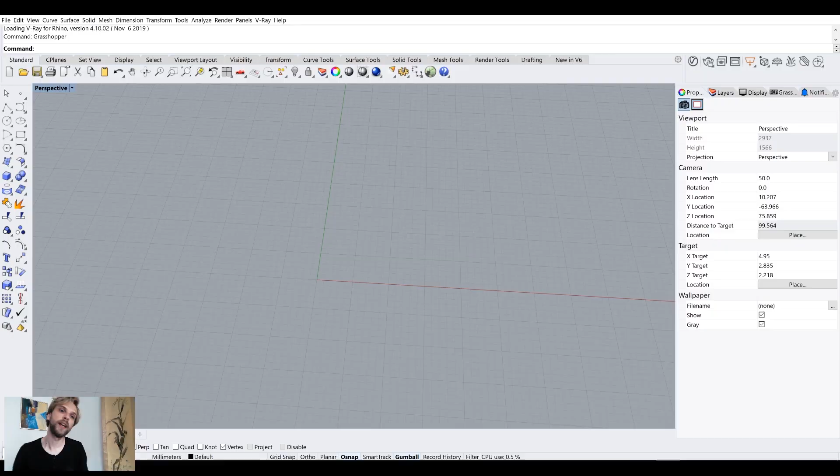Hello, and welcome to tutorial number 26 of the series of 2020, where we're going to look into curved folding of steel sheets and how to do that in Grasshopper.

Last tutorial, number 25, we looked into origami, and I was thinking that, well, origami most of the time just has this kind of straight line fold, but what if you use a curved fold? And then I started looking into these really cool, I guess more experimental pieces, and figured out that you can indeed make a curved fold, and we'll be trying to do that. So let me just find one that's kind of, yeah, something like this.

You have something flat packed, then you just have these kind of seams, these kind of ridges, which you fold, and you end up with a three-dimensional shape right here. And some of them are quite cool, some of them are quite boring, but this is pretty damn cool, I think. So let's do that in Grasshopper.

And before we begin, there's one thing. Most of the steps that I take here are going to be quite similar to the ones that I've already done in my previous tutorial number 25. So I will be going through them quite fast. If you want a slower version, just check out that tutorial.

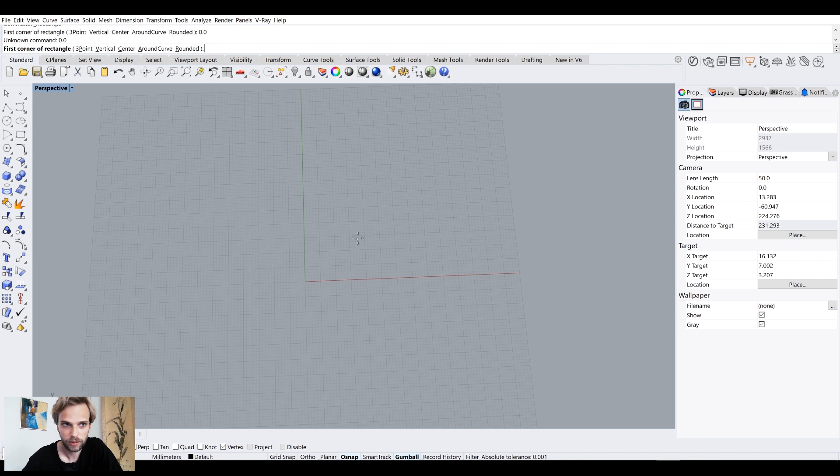Okay, so let's begin. I will start by specifying... Hello? What's up with that? I'll start by specifying a size of my sheet, right? Of my steel sheet. And I'll just draw a rectangle for that. So I just have this kind of rectangular curve. That's my steel sheet.

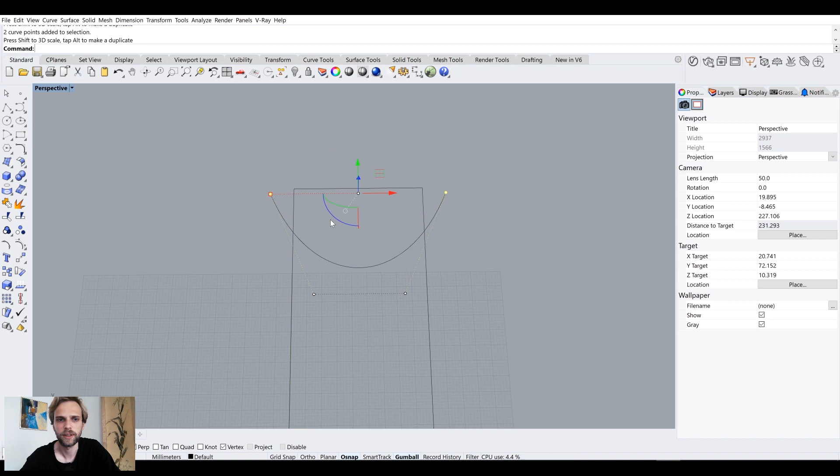And then on it, I will draw, I guess, curves, right? So I will just take my control point curve, and I will just draw, let me just get that perpendicular snap turned on, and maybe smart track. Usually I don't use smart track, but in this case it might be useful. Smart track. There we go. So I just draw out a curve, and it doesn't need to fit perfectly. Let me just do this, for instance. It doesn't need to be perfect. It just needs to be there.

And I'll see that this curve, where it intersects with the rectangle, is going to be a fold line right here, right? So I want actually to have two of them. So, I'm lazy, so I'll just mirror the one that I already drew to the other side. And perhaps we'll have a third fold line, which is going to be boring, and it's just going to be a straight line segment. Later on we can mess around with that a bit more, but for now I'll just leave it as a straight line segment.

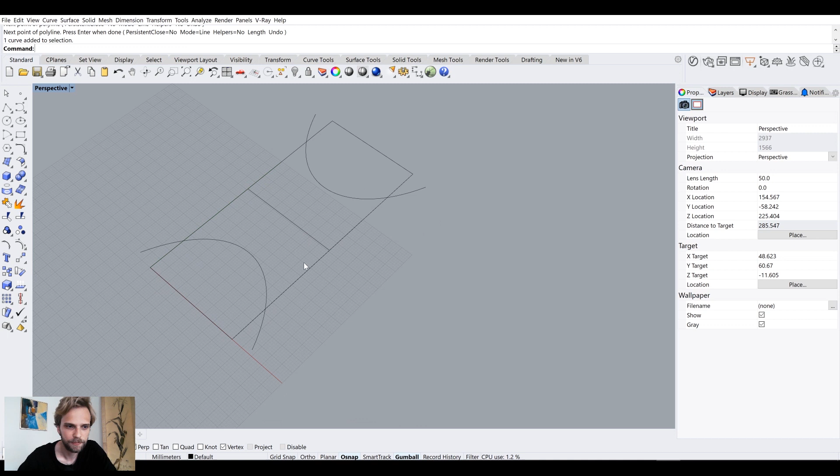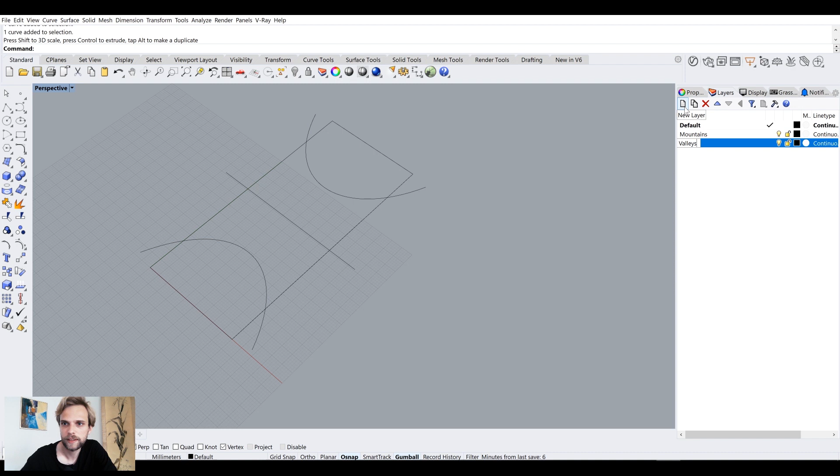Alright, so we drew a basketball court. Who cares? Okay, and that's all I need, right? Perhaps, just to make it pedagogical, I will create two layers and call one of them mountains and the other one valleys. And mountains will be blue and valleys will be red. And I will take these two arcs and I'll say that those are mountains, and I'll take the middle line here, and that is a valley. So mountains and valleys, right?

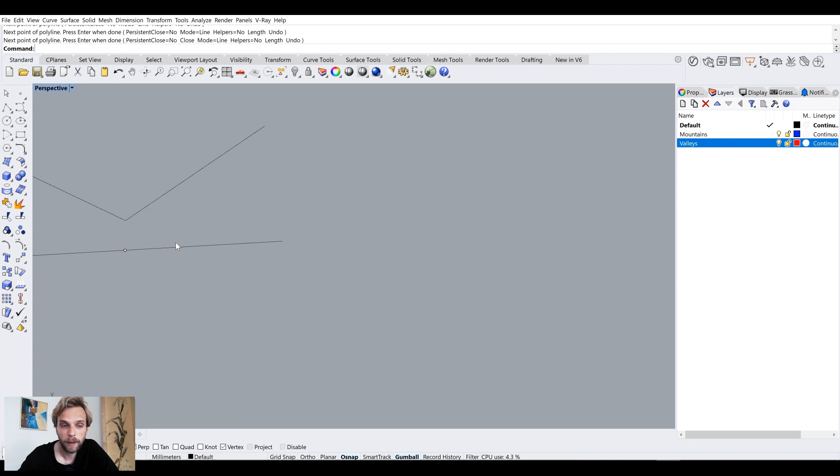Valley means that as a sheet of paper folds, let's say we're looking at it from a section, if there is a valley line right in the middle, just like here, as the sheet of paper folds, it will fold like that, right? If there is a mountain line here running through the surface, it will fold upwards, right? So it's just basically the direction of the fold, nothing more.

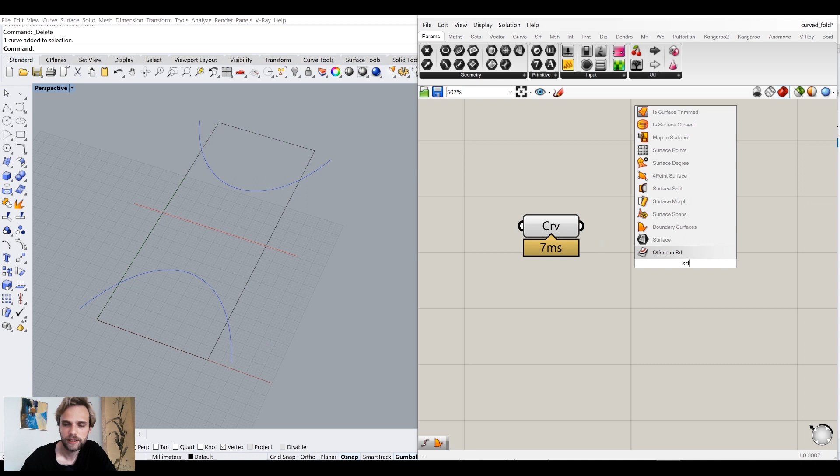Okay, let's begin working with it in Grasshopper. I already have a small setup here, but I will be repeating everything. This is just my notes, so don't worry about that. I will reference in my rectangle here as a curve. Set one curve like that, and I will make it into a surface. Since it's a flat rectangular curve, I can just type in surface and plug my curve into a surface, and it's going to make a surface.

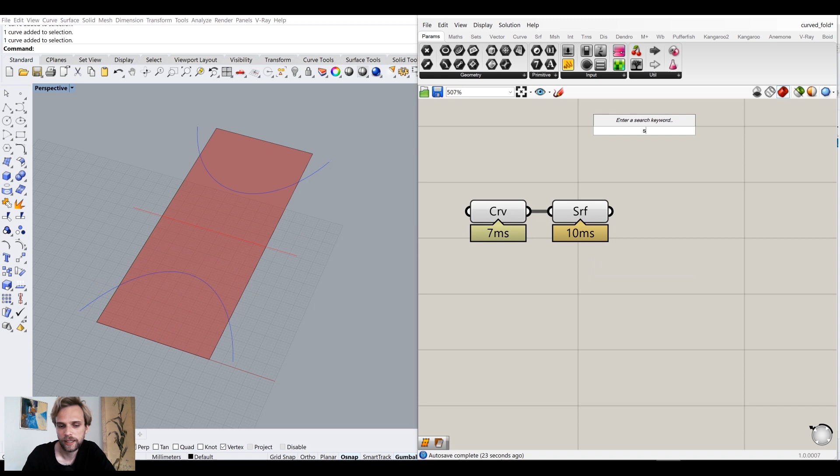Okay, that's good. And then I want to take the surface that I have and divide it into 4 surfaces with these 3 curves, right? All of these 3 curves. So I will say surface split, and I'll connect my surface to the surface input. And for my splitting curves, I will just type in CRV again, curve component. Right click on it, set multiple curves, and I will just set all these 3 like so. So now, hard to see, let me hide the layers of the curves for a bit. So now you can see I end up with 4 surfaces, which is great.

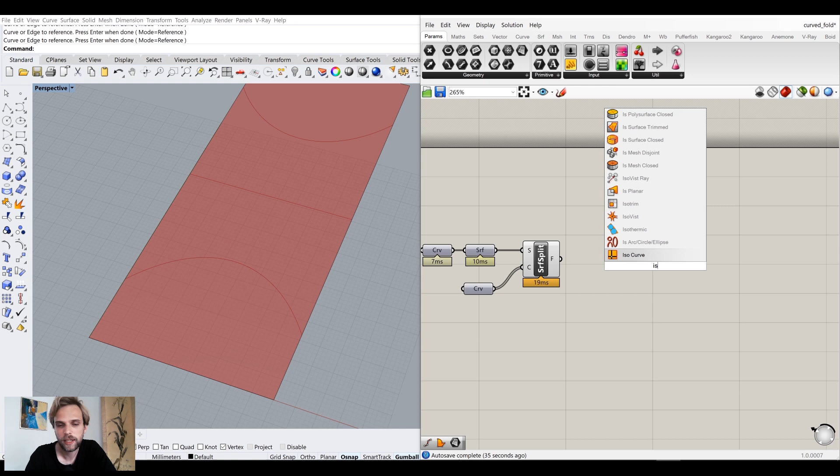Then I want to divide them up. I basically want to have more resolution, right? So I want to divide them up into these kind of small stripes. I can do that by using a tool that's called Isotrim. And it asks me for a surface input, and I have 4 of them. That's perfect. And then it asks me for a domain.

And I'll stop. There's a problem. It asks me for a surface input here, base surface, and I'm giving it trimmed surfaces. So Isotrim will not work because, for instance, if I have a surface like this, right, and I trim it with, let's say, this shape, trim like that. If I trim it, this is a trimmed surface, right?

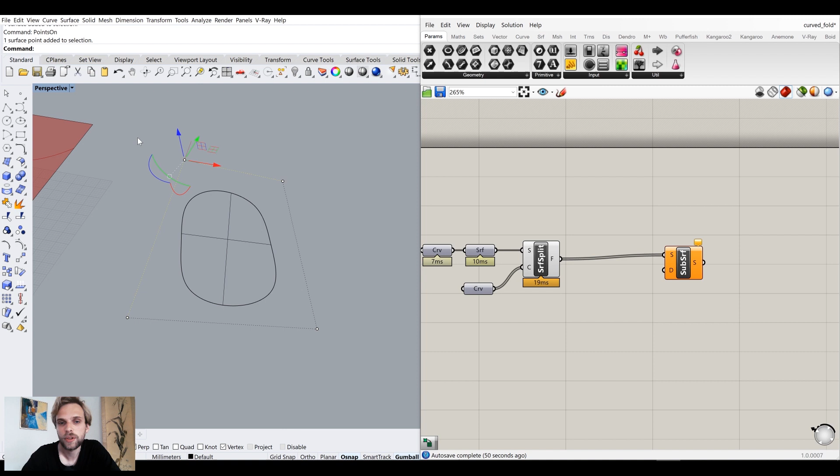Looks okay, but if I were to turn points on, you can see that the control points are from the original surface, meaning that the domain is also going to be from the original surface for each one of these. Every single one of these 4 pieces will have the same domain, and it will not work. So we can't do it this way, but instead we need to do it in between the surface here and the surface split here.

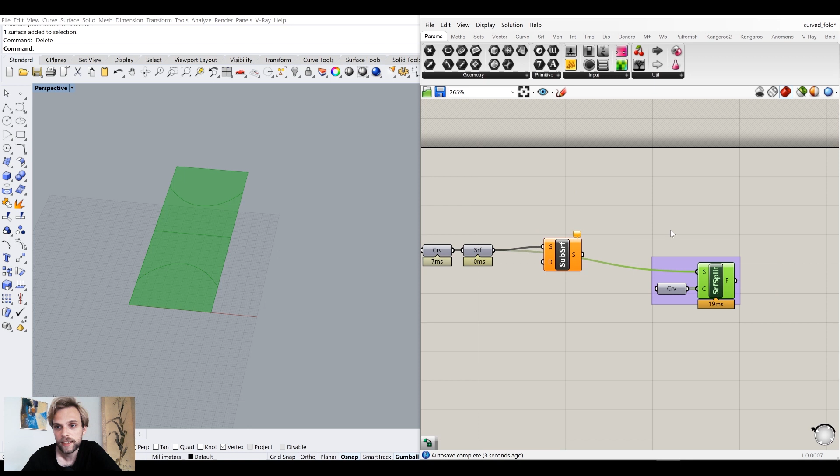So let me actually group that part. So the large surface will need to be divided and then split with those 3 curves, right? Like that. Then it will work. So now let's divide up the large surface that we have here. Isotrim asks us for a domain, and I can get a domain by just going to Math, Domain, Divide Domain squared, 2-dimensional domain.

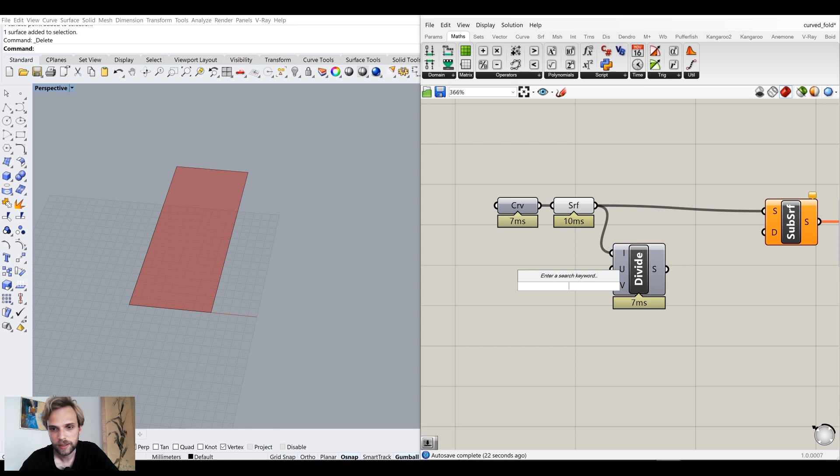It asks me for 3 inputs. The first one is my surface. The second 2 are going to be how many divisions. I don't want any divisions in the same direction as I have my fold lines. I want divisions in the opposite direction. So one of these inputs is going to be 1, and the other one is going to be, let's say, 11.

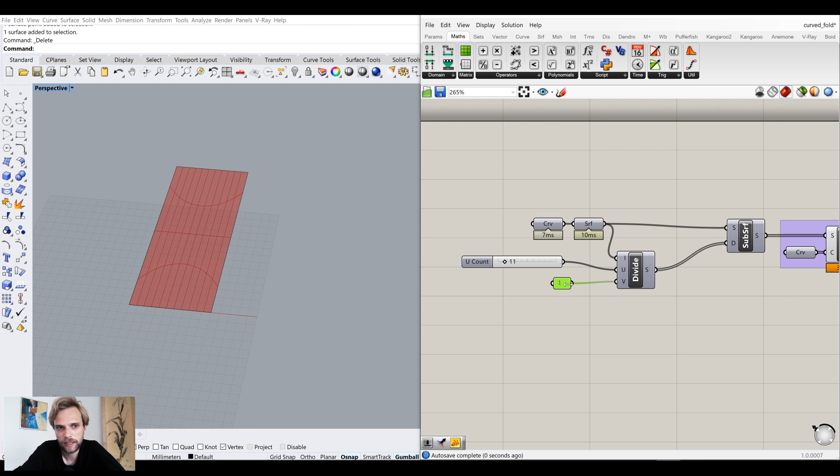I'm just plugging them in 1 and 11, but it might be the other way around for you. You will see it once you connect your surface to the divide domain, and your divide domain to the domain input here. Like that. Let me hide a bunch of stuff. And I can see that I messed up, the divisions are indeed going in the same direction as the fold line, so I need to swap these two guys. Like that and like that. And now it's exactly as I want it to be.

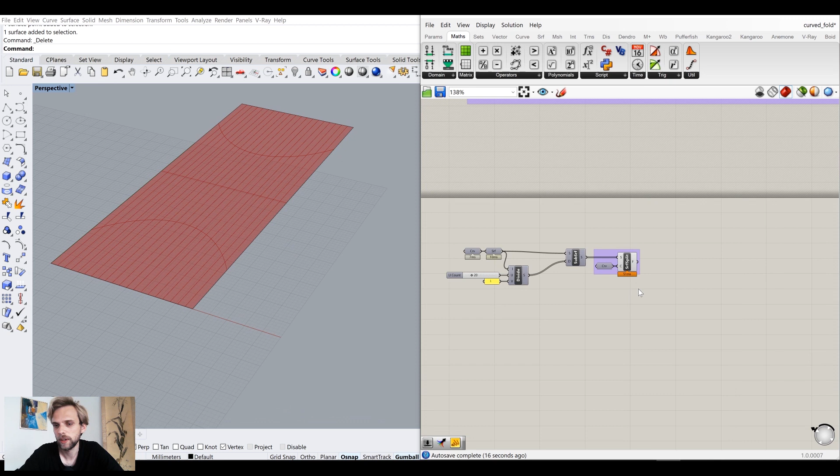Increase, decrease. Don't do too much though. For now I will do 20 and we will see if it works with 20. Okay, so we have that going on, and we have our fragments, right? Basically the way it works is we have a surface, then we make 20 long surfaces with this component. And then we take every single one of these long surfaces and we split it with 3 curves, right? So we should have 80 surfaces in total, and we do.

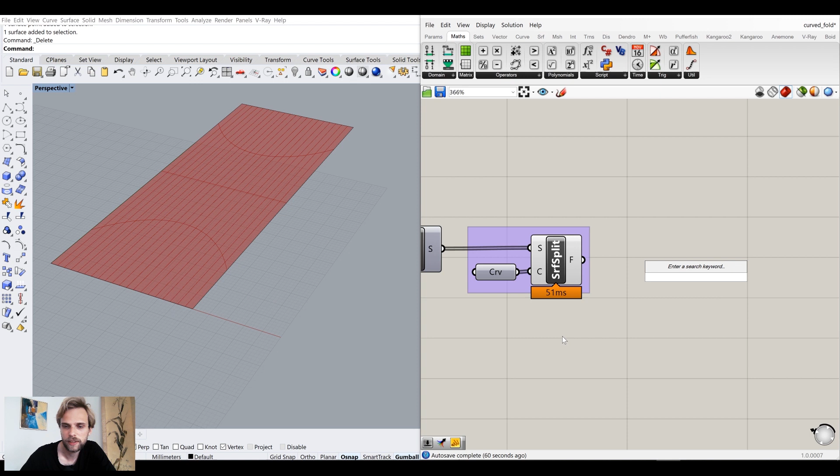Okay. So now I need to make them into a mesh, and it's going to be quite easy. I just need to get the corner points of these surfaces, and I believe Discontinuities will give me that. Yes, indeed they do. So I get my discontinuities here, 4 corner points. I know for a fact that every surface here will have 4 corner points. So that means I can use Construct Mesh.

The way Construct Mesh works, it asks you for points, and see how this already has a default value of quad between 0, 1, 2, and 3. It's just going to make a single mesh face between those 4 points that you give it. Perfect. We do it. There we go. And I just keep hiding stuff. So now Construct Mesh gives us 80 mesh faces, right?

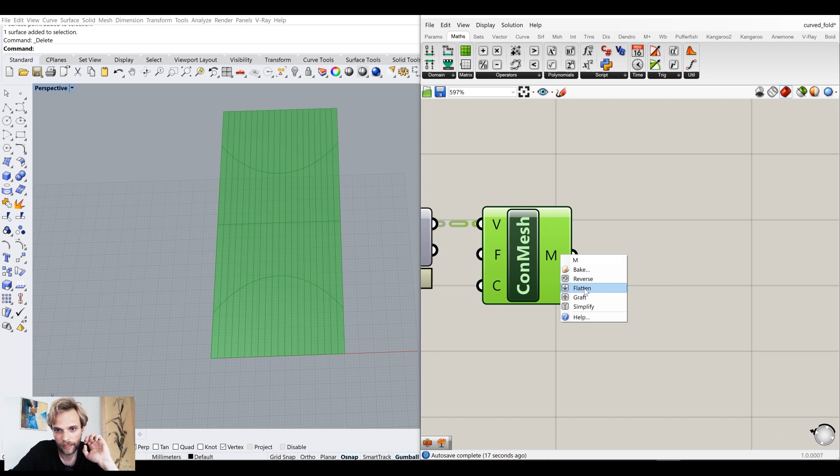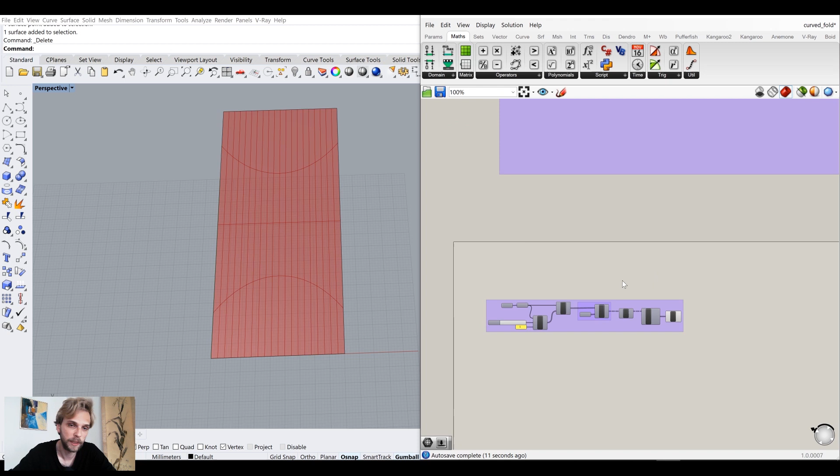All of them in separate data branches, so I don't need that. I will flatten it. So now everything is in a single list, and I will just use Combine and Clean from Kangaroo 2. It basically just joins up the mesh and cleans it up. Okay, so we have a mesh ready. This whole part is responsible for making a mesh. Yes, we are well on our way. Now I will not be doing those 2 parts yet, I will be doing them a bit later. I just want to see this folding in action.

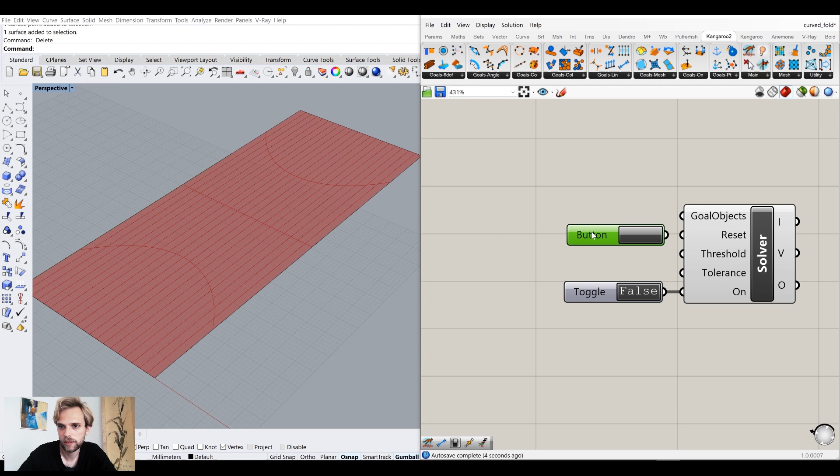So we have a mesh here. Let me position it properly. I will just create a mesh component, just like that. Okay. And now I want to create a Kangaroo script, right? So I will go for a solver. Again, I know I'm rushing, but the slower version is available on tutorial number 25, so you can check it out. So toggle is false, button is a reset button, and then I Entwine to be able to get more than one input in.

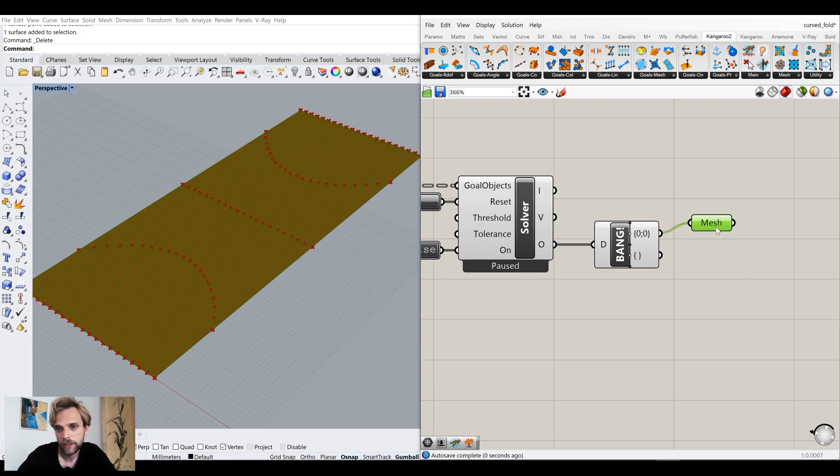Then show will be always at 0, 0, and we will be showing a mesh. And actually I just want to create a separate mesh container here for the show, just like that, and connect these 2 guys. Perfect. And then solver output will also come out as a data tree, so I exploded that data tree, and I know that since mesh comes into 0, 0, from 0, 0, a mesh will come out. And I'll just make a custom preview, make it pink. All right, and I just hide everything.

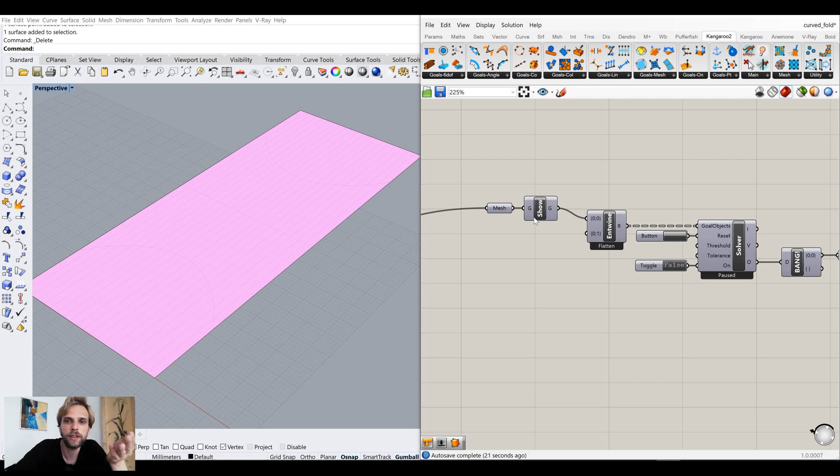So now we have first goal, and we have a solver doing its thing. Now for our other goals. First of all, we don't want the material, this sheet of metal or sheet of paper, doesn't matter, we don't want it to be stretchy, right? So I will go for goals mesh, edge lengths, and it asks me to give it a mesh. Sorry, I'm just thinking. Yeah, so I will give it a mesh here.

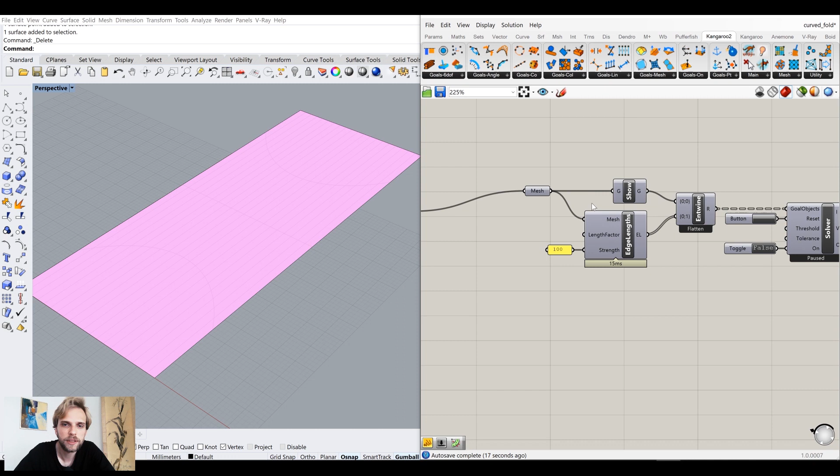Yeah, and I will say the length factor is 1, that's perfect, and strength, I will just give it like 1,000 strength. So definitely a really, really strong force. Maybe 1,000 is a bit too much. Let's try 100. How much did I use here? I can't see. Just let me unfreeze this. No, that's the wrong one. 100, yeah. So I will use 100. Okay. So now basically every line on the mesh tries to stay as it is, and also show the mesh. We have 2 goals.

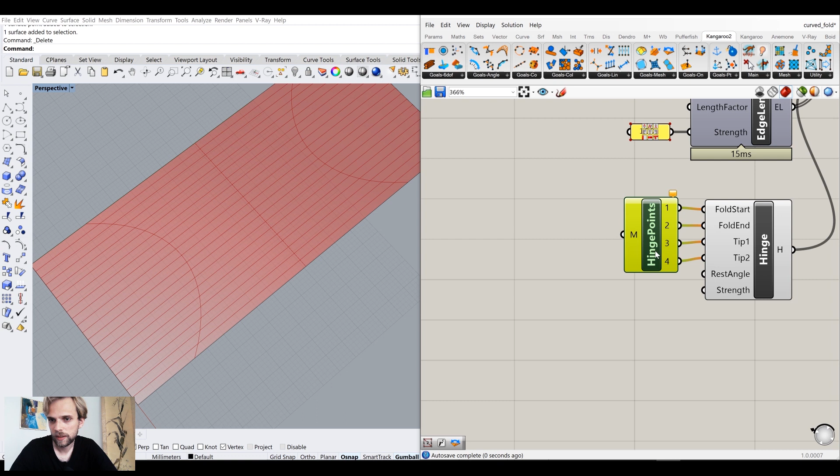Nothing fancy. Okay. Next up, we need bending, and for bending, we will be using goals mesh hinge. Right? Oops. Hinge. This goal right here, which connects to 0, 1, like that. And then it asks me for 4 points. I could extract them manually, but I am lazy. So I'll just go to under Kangaroo 2, mesh hinge points. Hinge points right here, and just connect them like so. So it's like door hinges, right? And I'll connect mesh to here. Okay. So we have that working.

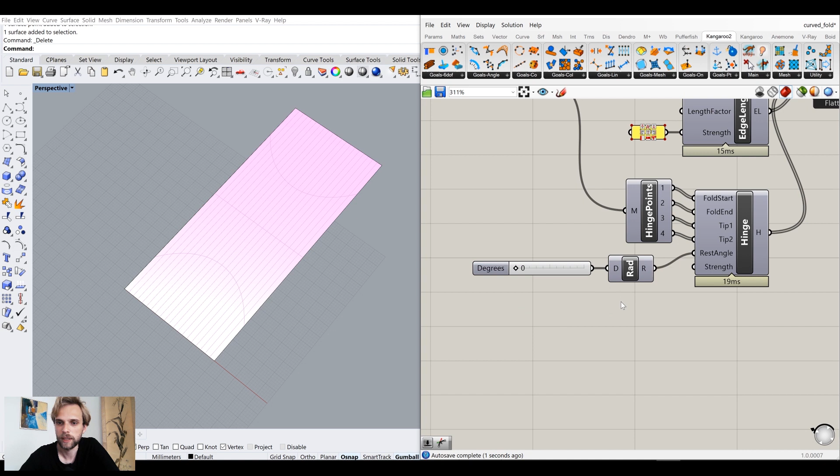And the strength, we don't care. The rest angle, though, we do care. So the rest angle is going to be, first of all, it's going to be in radians. So I will be using degrees, but I will be converting them to radians here. And degrees are going to be between 0 and 120. For now, let's do 0. Connect them like so, and that's my main thing here.

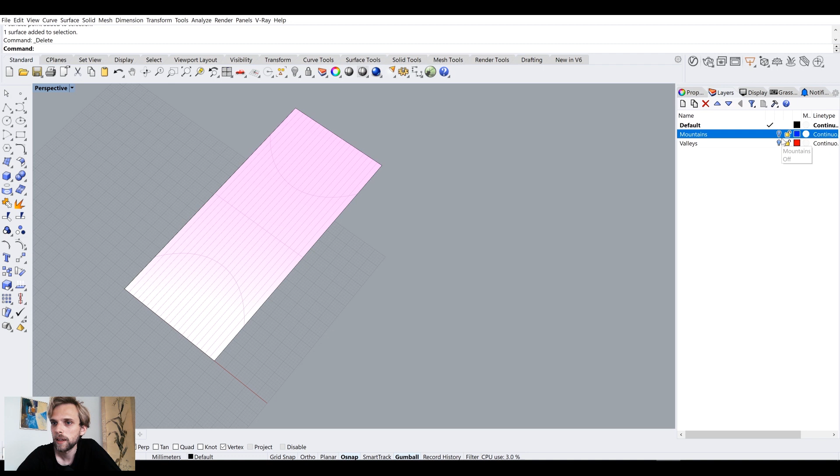There we go. Okay, so the problem now is that every single edge here is a hinge for this definition. So everything will kind of crumple. We only want edges that are running right along this curve and this curve to be hinges. And again, I did that in tutorial number 25, so you can check out the slow version there, but I will be, of course, doing it again here.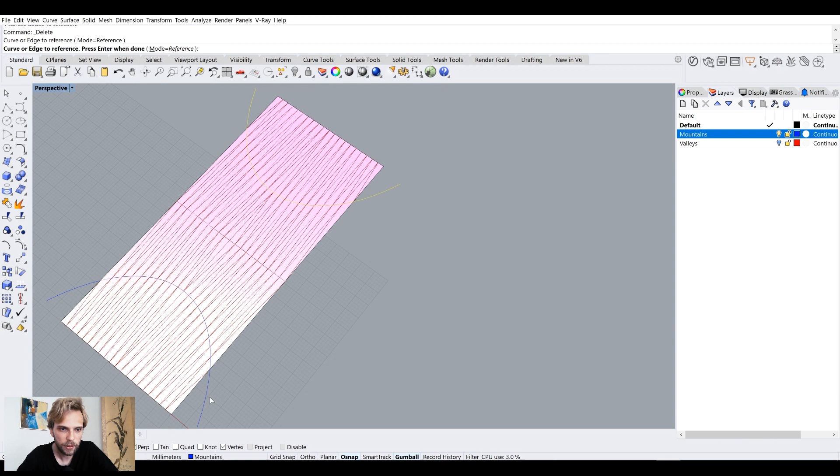But much faster. Line, I just create a line between first point and second point to show where the hinges are. And yes, it triangulates the mesh, don't worry about that part, as long as we still get these lines here, and also we will fix the mesh triangulation in a bit. So we get all of our hinges, and then I will create a curve component, set multiple curves, and I will just reference in these 2 arcs here, just like that.

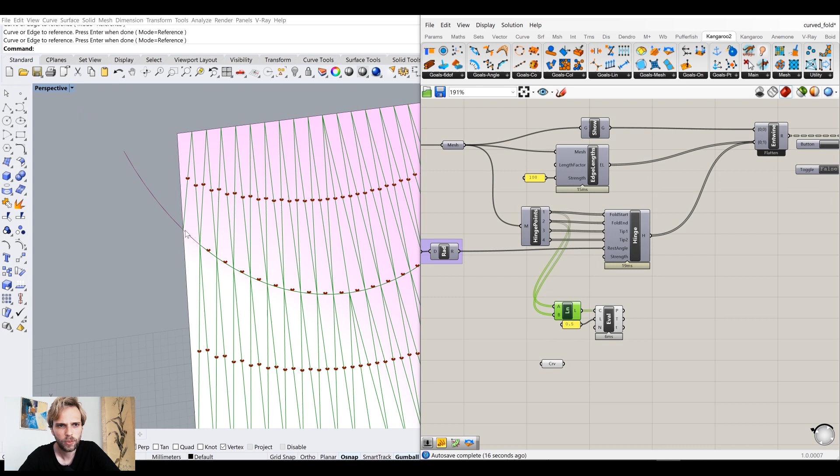And I will say every line here should give me a center point for each line. Evaluate length / 0.5, and just connect it like so. So I get a... oh yeah, okay, that's perfect. Is it though? Why are you not, and you as well? What's up with that? Wait, something's fishy.

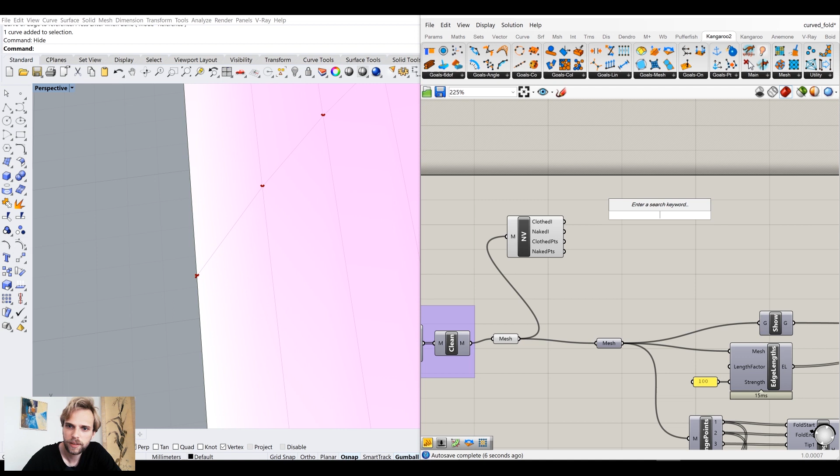Hide. Are you considered to be a naked point? Something's messing up. Just a second. Panel, no, not panel, just point. Yeah, so this point is a naked point for some reason, but that's fine. We can fix it by, right after combine and clean, we can use align mesh vertices, align vertices. Yeah, let's try align vertices. And the result has 107 vertices, and this one has 107. Okay, 0.1. Why are you not working?

This align vertices component never works. God damn it. Okay, let's see. Weld, mesh weld vertices. This component right here. What about you? 105, super. Okay, so this just works.

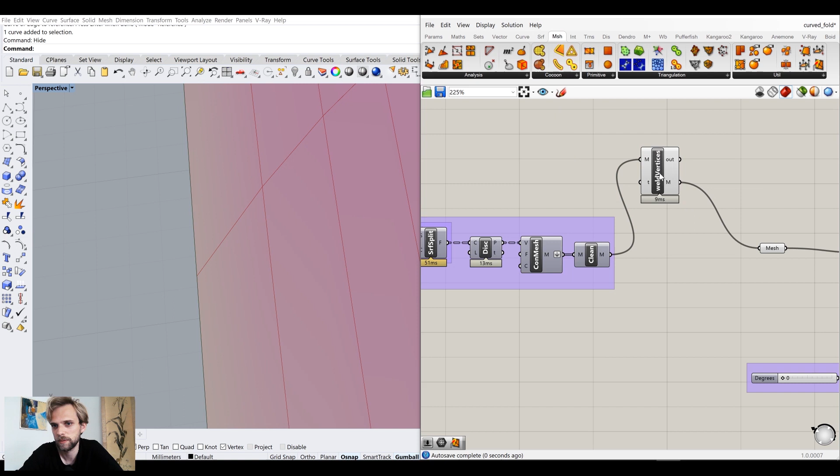I don't know, I'm having problems with the align mesh vertices. But basically, this one just removes all of the duplicate vertices from the list. So now all of the midpoints are correct. Okay, good. And basically, I just want to measure. I just want to drag these midpoints towards the curve, right?

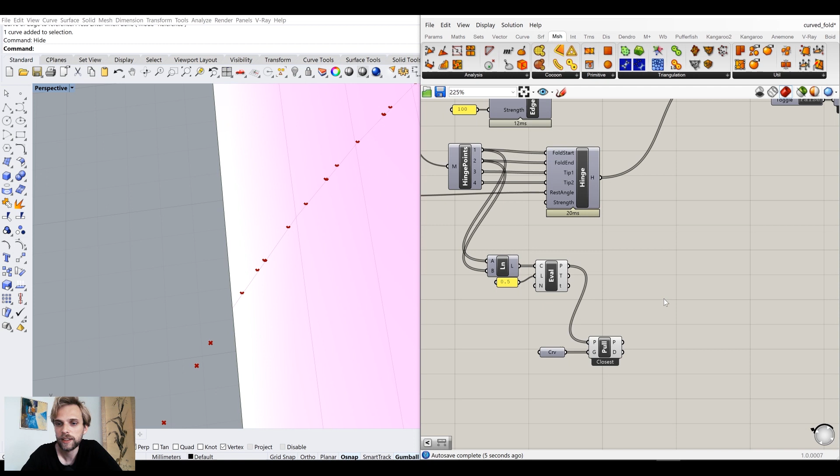So I will pull point. So pull every point towards the curve, and I get a bunch of distances. So basically, it's just measuring. It's finding the closer curve from these two for every one of these points, and it's just measuring distance to them, right? And from these distances, I will ask, is it smaller than, I don't know, like 0.1?

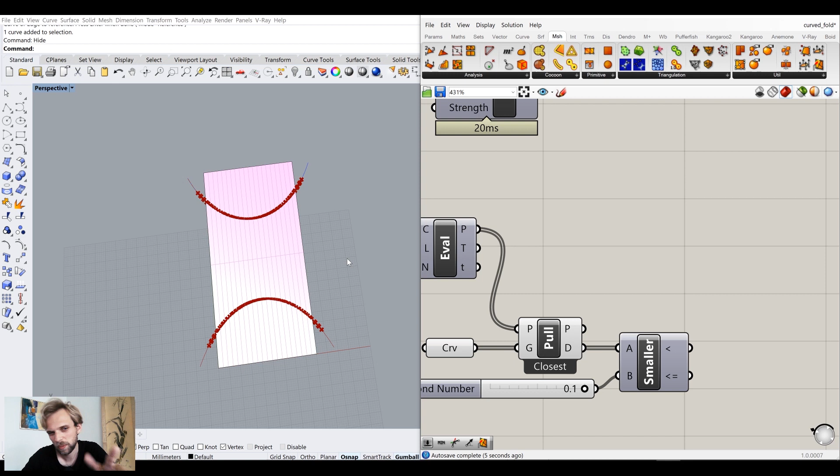We need to work with tolerances for this to work. So is it smaller than 0.1? If it's smaller than 0.1, it's fair to say that it's a point that is on this curve. Okay. And I have true and false statements, and I can cull pattern with these true and false statements. And for now, I will just cull the lines just to see if it works or not.

Control A, hide, and hide stuff here. Yeah, seems to be working. So I cull all the lines. But we don't want to cull the lines. What we want to do is cull the hinges, right? We want to cull the holes, so that it only bends on these lines. So instead of culling lines, I will cull the hinges and connect that to my entwine instead of the original hinge.

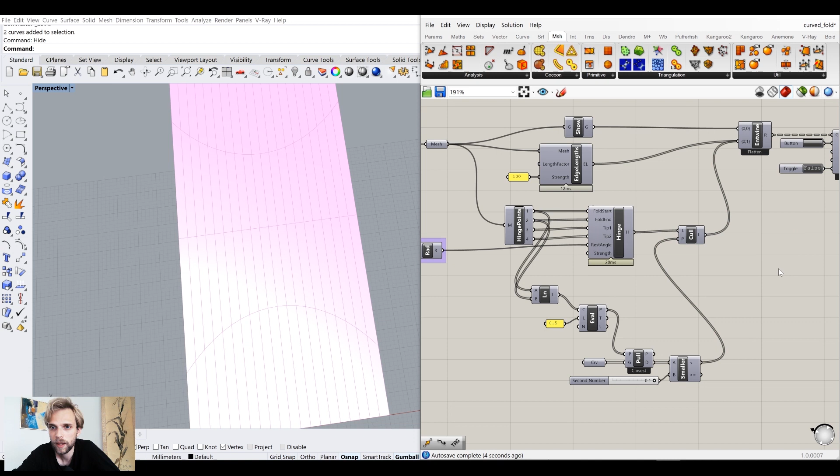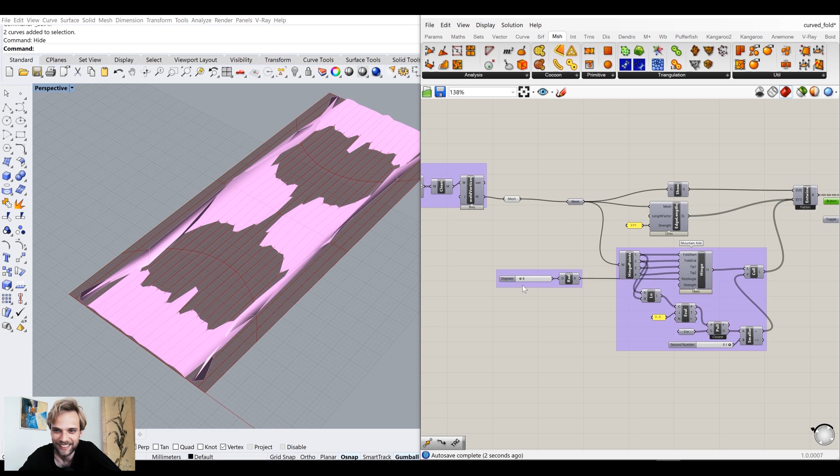Okay. And I will just group this part. So we have our mountain folds here, and I can just call this mountain fold. Okay. Shall we see how it works? It should work at this point. I will just hit reset, hit run, find a nice angle to look at it, and start increasing the degree. Oh, yikes. Start increasing the degrees.

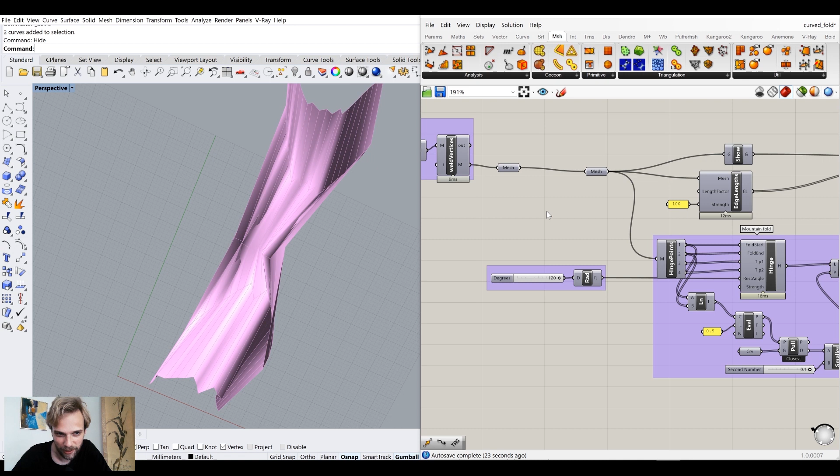I mean, it is folding. Don't get me wrong, it is folding, but it could be better. Okay, so let me change it up, and let's do the valley fold, this straight line here. So I will just copy paste this, connect it as well, and here as a curve, where's my valleys curve? I will use this one as the curve input, set one curve, and instead of mountain fold, I will call this valley fold.

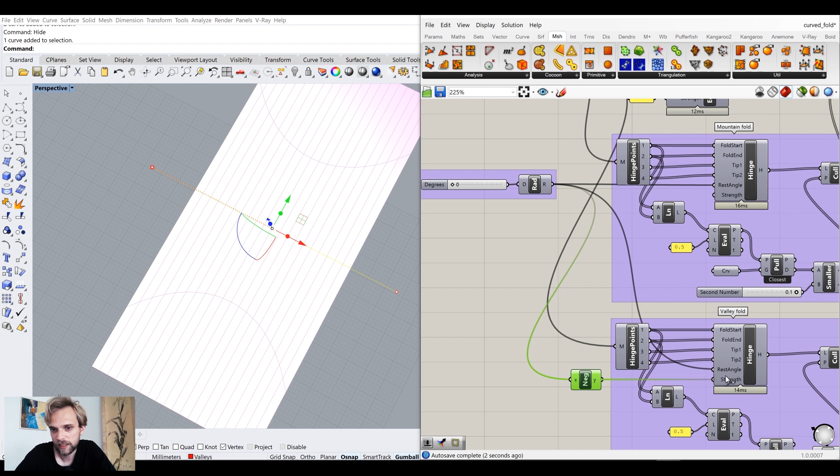And now the valley fold folds the other way, right? So it needs to have a negative rest angle. So I'll just type in negative, connect radians to the negative x, and connect the negative output to the rest angle, like so. All right, so might as well check out how it looks now. I will reset, run it, start folding it, and it just destroys itself. I mean, it is folding, but it's not great at all.

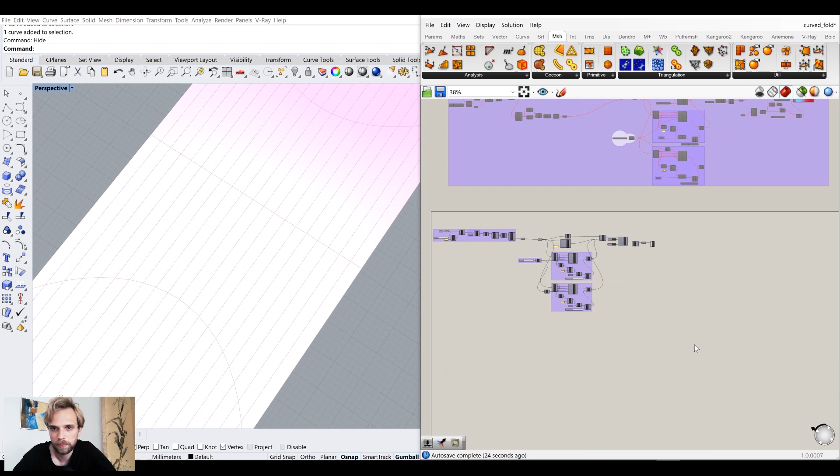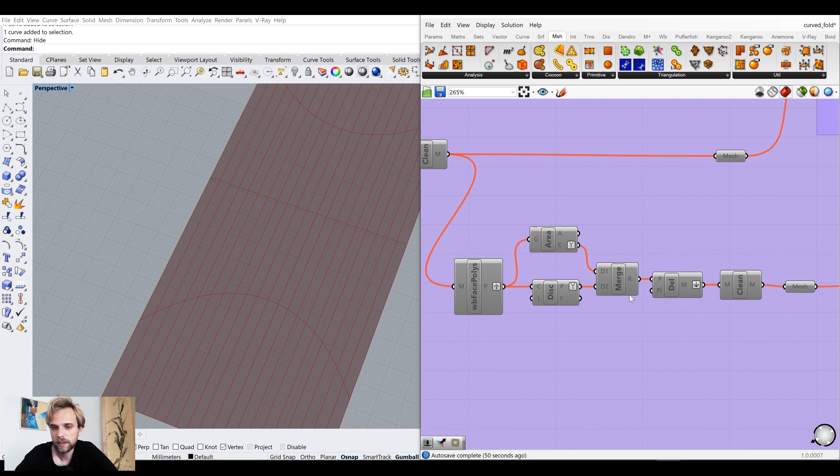Okay, let's make it better. That's why we have these two more clusters of things here, and also some stuff in the back, but it's mostly those two clusters. So between the mesh that we get here and the mesh that we feed into our simulation, stuff needs to happen, right? That stuff is going to be me manually triangulating the mesh. And I don't remember how I did that. That is not how I did that. That is how I did that, okay. So me manually triangulating mesh first.

Let me disconnect it so that it's not in the way. Like that. And I'll say, for every polygon, give me a polyline surrounding that polygon. So Weaverbird's, where is it? Weaverbird, extract, face polylines. This bad boy right here. Okay, and now give me discontinuities. Give me the corner points of each of these polylines. So I get these 4 corner points again.

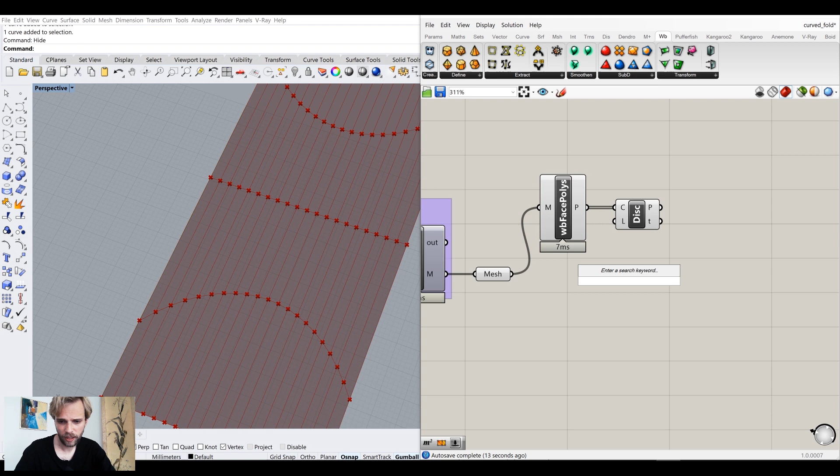And then give me polygon center as well. Right, so it gives me 3 outputs, but it's basically 3 ways of how to calculate the polygon center. I always use the first output here. So I can just type in point and say I will be using that one. Okay, so we have points coming out here, and we have points coming out here.

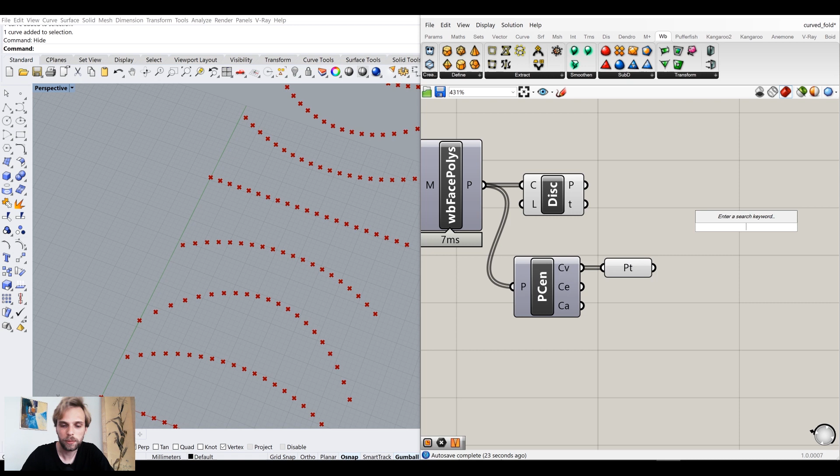And I want to create a data tree where I will have 4 + 1, 5 points in every separate list or branch of a data tree. So I will be using merge for that, connecting my corner points into merge input D1, and my center points into D2. And as you can see from the fact that one of the lines is dashed and the other one is not, this is a single list of center points, while this is an already separated list.

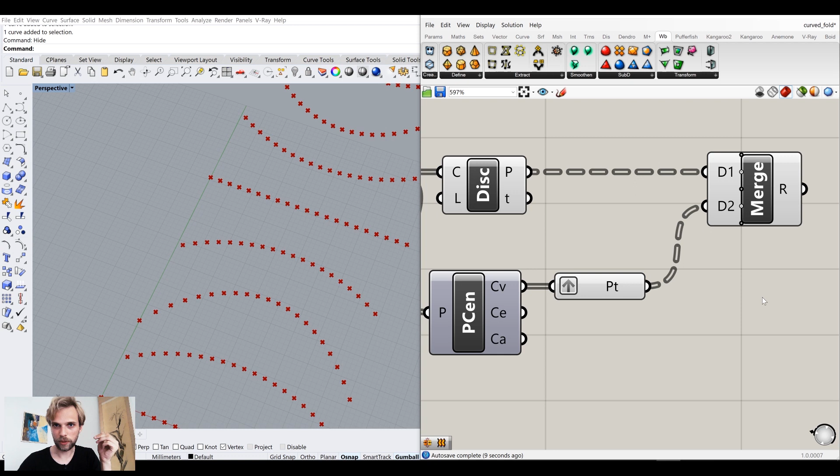So what I'm going to do is graft this single list of points. So now every center point gets its own branch, and hopefully it's going to merge properly. And apparently it does, because when I hover my mouse over the merge output, I can see it's 5 elements in each data branch. So then I just need to create a mesh between those 5 points. This is not a good way by any means, but it works, so we don't care, right? We use Delaunay mesh.

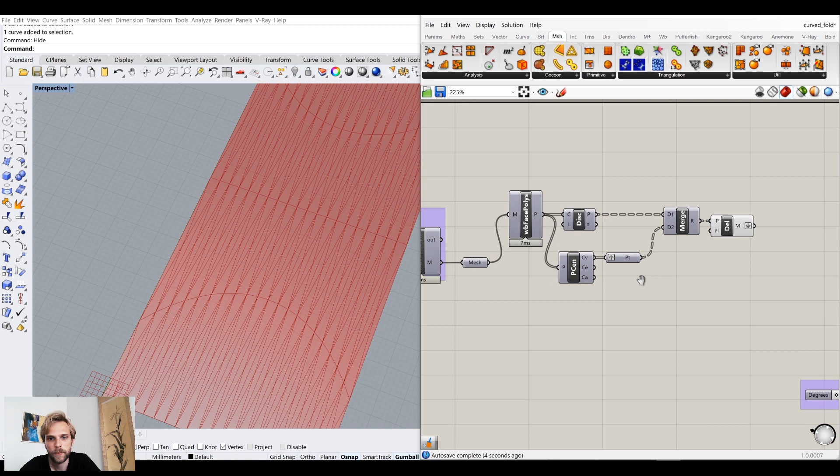We use this tool right here, right? Which asks us for points, and I just give it points, and it basically creates a mesh through those 5 points. So now we end up with 80 meshes again, all of them in separate branches. So first of all, let me flatten it out, just like that. And then I will again use combine and clean. And I will again use the weld vertices component. I'll just copy and paste it in like so, just in case, just to clean it up.

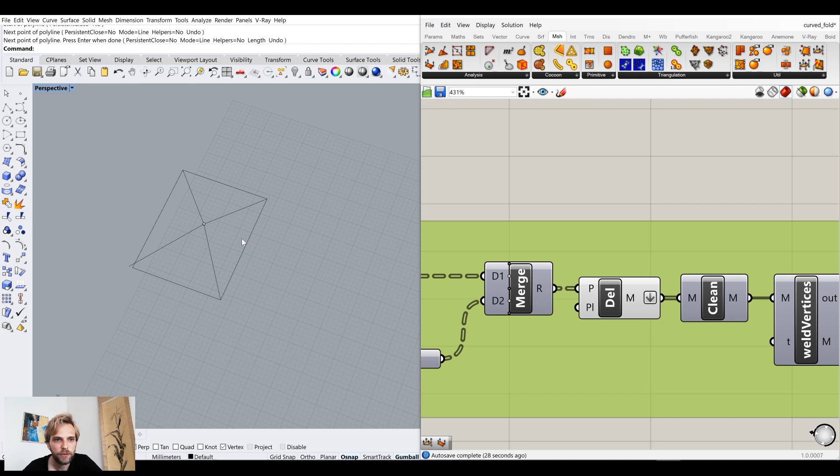So this whole part here is basically us constructing a mesh, getting a center point in each previous polygon and constructing 4, how do I explain it? We have a polygon, we get its center point, and we construct 4 triangles, like triangular polygons on it. So we basically just increase the polygon count of our mesh by 4.

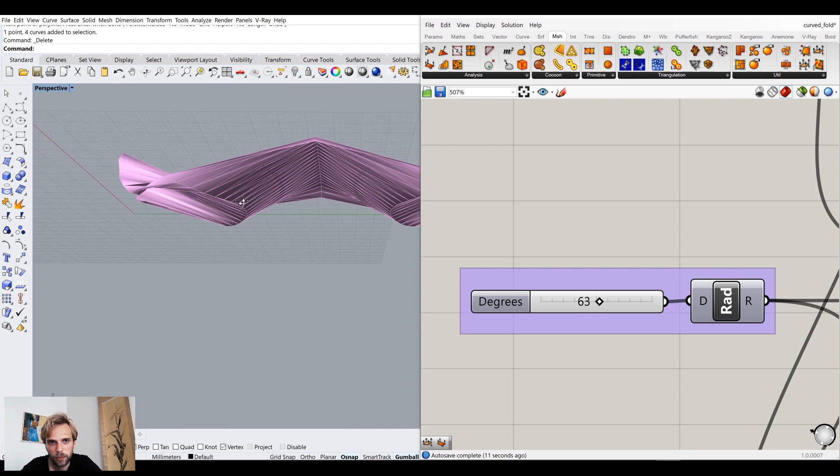And thus, if we connect it now to the mesh input here, it should be much nicer. Let's see. Custom preview, reset. Looks like that. Turn it on. Start increasing the degrees. It's still a bit messy, but now at least the center seems to be working quite well. So at least that. Okay, so we have that going on.

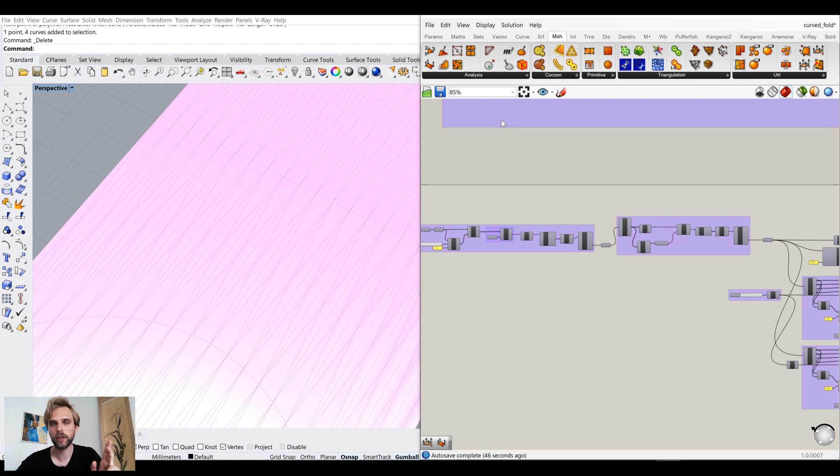Now the last thing before we finish up and just make it pretty is going to be creating cross bracing. You would think that we are creating cross bracing by doing what I just did, but we are not, because you do have that center point. I actually want to have an X, these 2 lines making an X on each of these polygons, and not letting the polygons swivel and twist and turn. Tutorial number 25 explains all of the reasons behind it.

All right, so I'll be reusing the face polylines tool here, and I will be getting the discontinuities again from it. So I get the 4 corner points, right? And then I will use list item, and I will extract the first item of the list, the second, the third, and the fourth, right? So 4 corner points extracted separately.

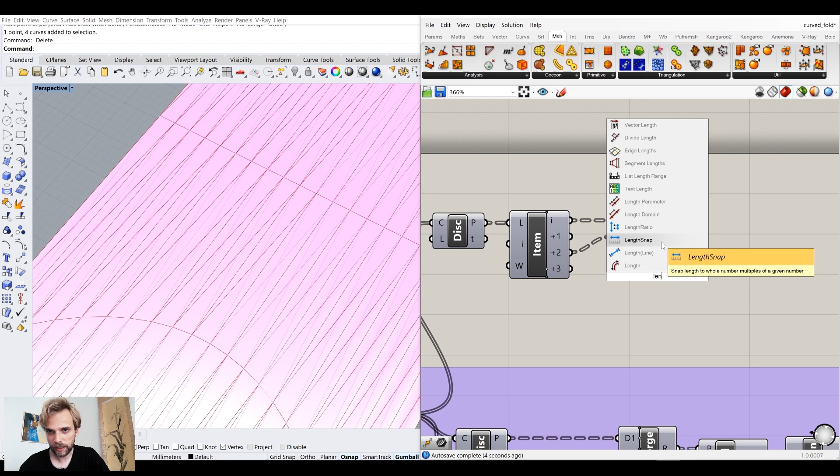And I will draw a line between the first corner point and the third one, so one part of the X, and I will draw another line between the second and the fourth corner point. So we have a bunch of X shapes here. And I will merge these lines into a single happy family and flatten them out. So now all of them are in a single list.

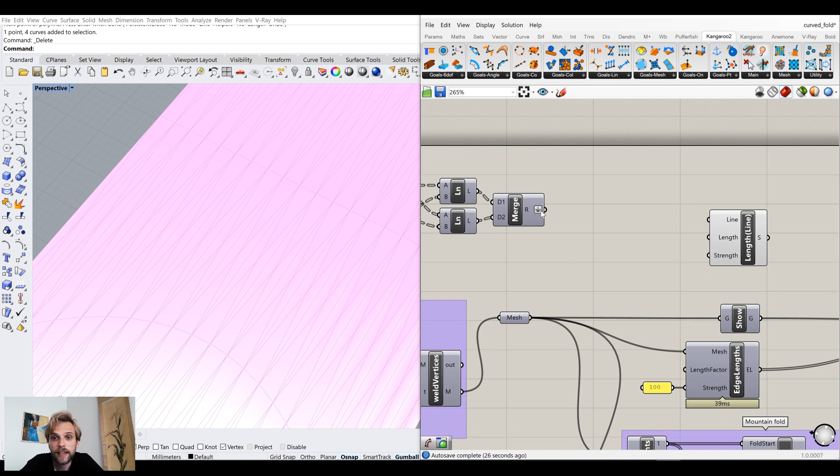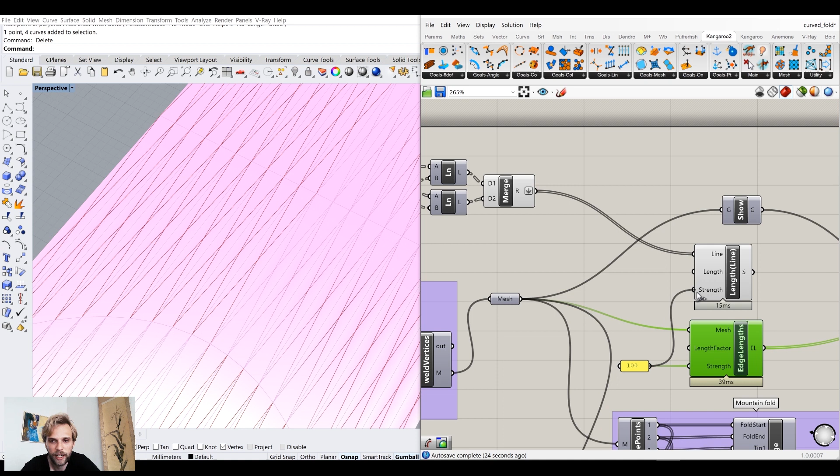And for these lines, I will do a separate thing. I will say mesh, no, not mesh, line length. Let's go to Kangaroo 2, goals, line, length line. Perhaps show should be here a bit higher. These lines that I have here, these cross braces, should also try and keep their original length. If none provided, starting length will be used. Perfect. So they should keep their original length with the same strength as any other edge of the mesh. So that's an additional goal that we give our mesh to make it stiffer.

And now if I run it through, let me hide that. Now if I run it, it should still mess up a bit, but much, much less. There we go. See how much cross bracing matters? So we end up with something like this.

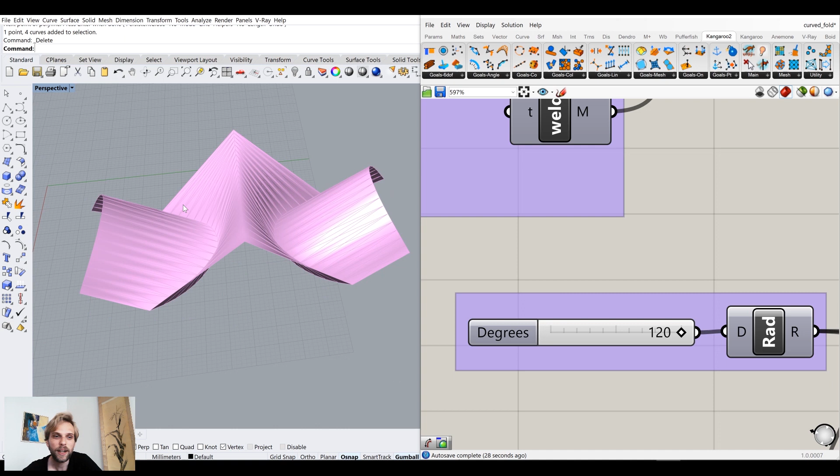Cool, huh? So now you can start messing around with the patterns that you have and that rectangle, because all of the inputs that we are using are these curves here. So you can start designing with this tool and start seeing what works and what doesn't. And keep in mind, some things you just cannot bend, right? It will break. So there are rules behind what you can bend with a curved line and what you can't.

Before we finish up, there's one last thing I want to do, and it's color it according to how much the material stretches.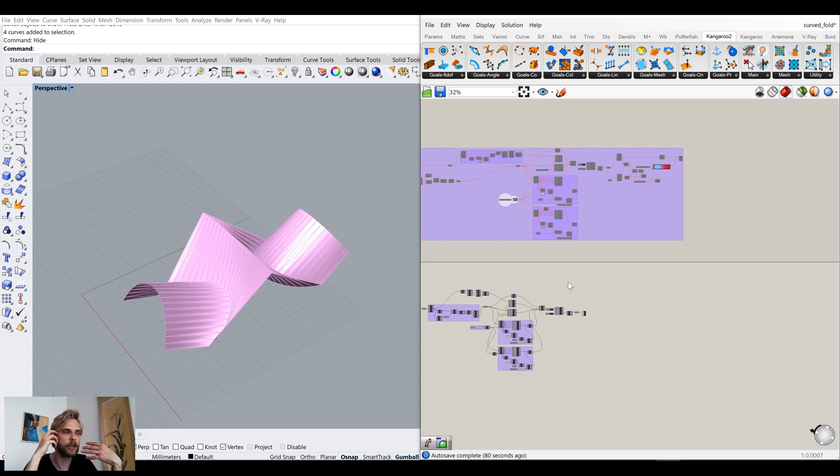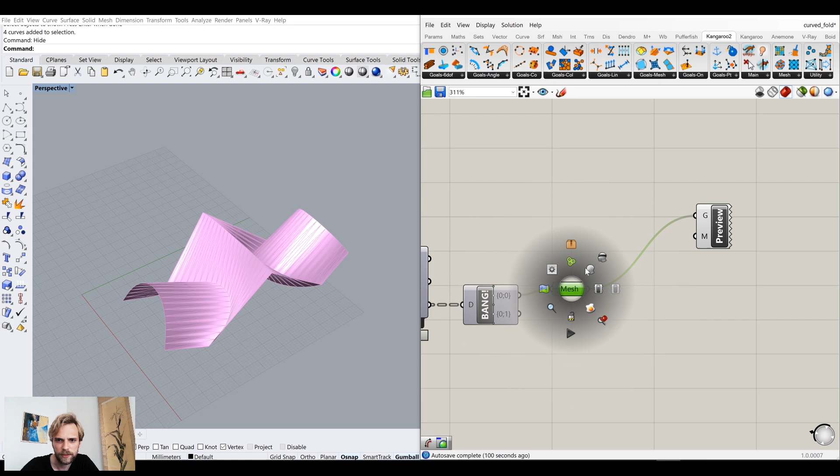So every material has a certain amount of flexibility in it, and I want to color the mesh according to how much each polygon stretches out. And I can do that by measuring the area. So I have this simulated mesh here, and I have the original mesh that is here, right? The flat one, before simulation. So before and after simulation.

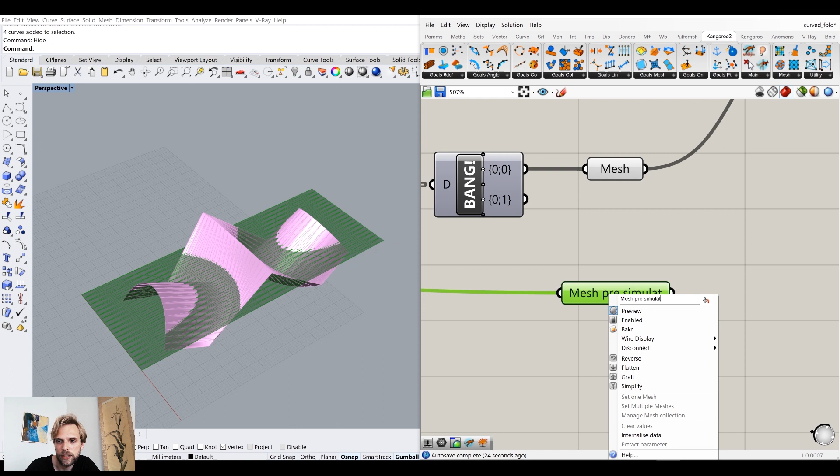So I will just create a mesh component and connect it like so, because I don't want long wires. And I'll just drag it out, and I will right click on the mesh input, go to wire display and choose hidden. Usually I never do this, but in this case, sure. And I'll just rename this mesh pre-simulation. There we go, mesh pre-simulation. And this is mesh post-simulation, right?

So we have mesh pre-simulation and mesh post-simulation, and we need to see how much every polygon stretches. So what I'm going to do is I will say, give me an area. No, maybe we need to get faces. Mesh faces. Fine. Let's just get Weaverbird. Where is it? Weaverbird face polylines. Face polylines for this mesh, and face polylines for this mesh.

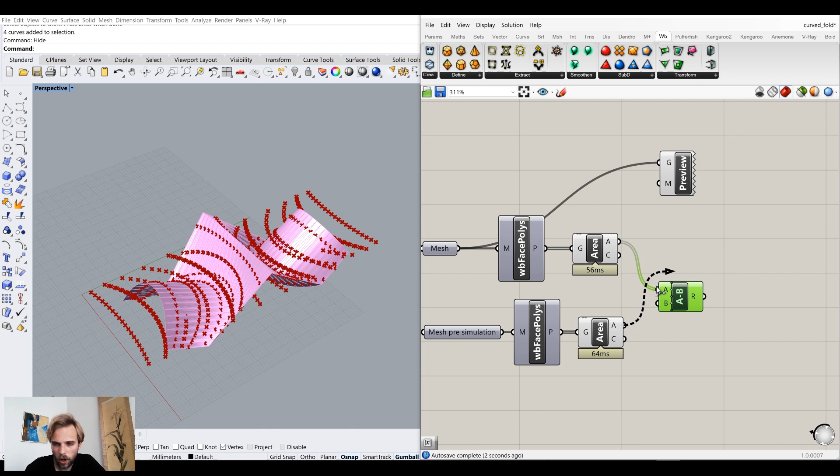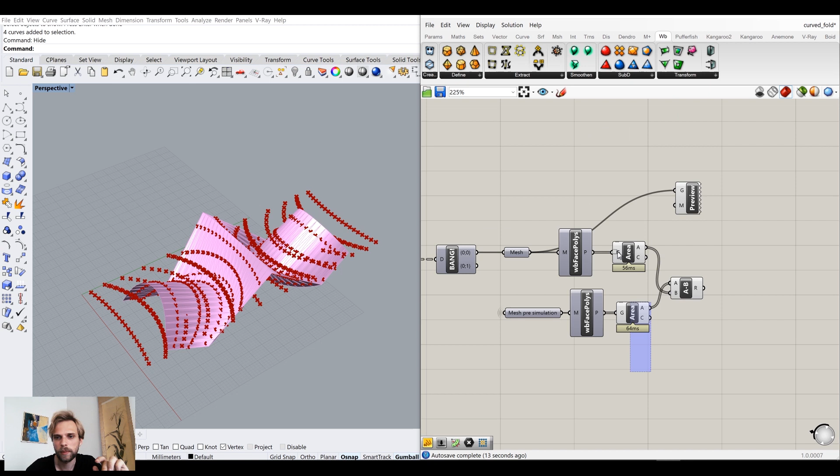So we have polylines, and I will just measure the area of these polylines here and area of these polylines here. And I will compare the change between the original area for every polygon and the new area, right? So I will subtract from the original the new area and see what kind of output I get. These are the changes in square millimeters or whatever between the original and the new for each polygon. And some of them are in minus, some of them are in plus. I don't really care if it's a negative or a positive one.

So I will go to maths. No, it's not going to be mesh. It's going to be maths operators absolute. So everything is a positive value now, right? Okay, so we have a bunch of positive values, and then I want to have a percentage. How much did the original area change in percent? So I will divide this change value, how much it changed, by the original area, and I will get a percentage, right?

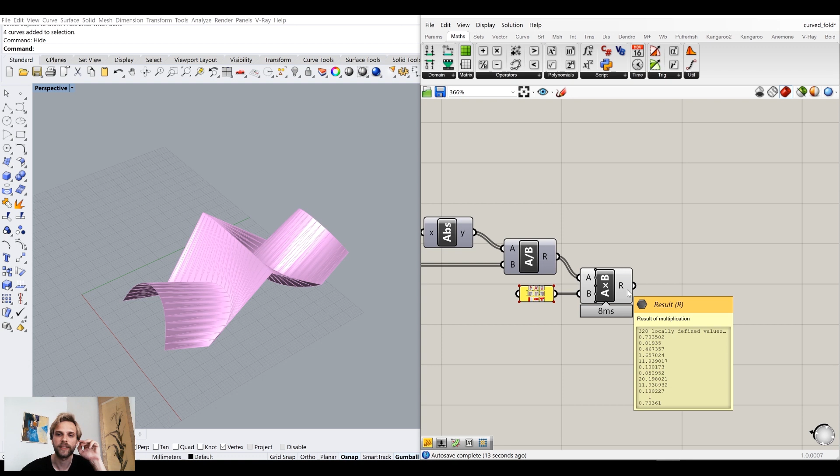No, I will not. I need to multiply it by 100. Proportion, you know, you need to multiply it by 100 to get percentage. And this is percent, how much it's changed. So we can see that some of them are even changed 20%, which is a lot, but you can control it by increasing this value right here and forcing it to be even more rigid. And let me stop the simulation for a bit. Okay. So we have changes here.

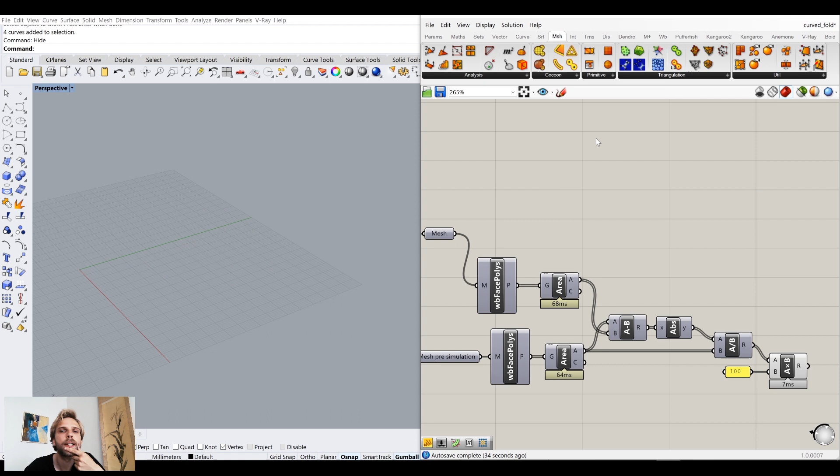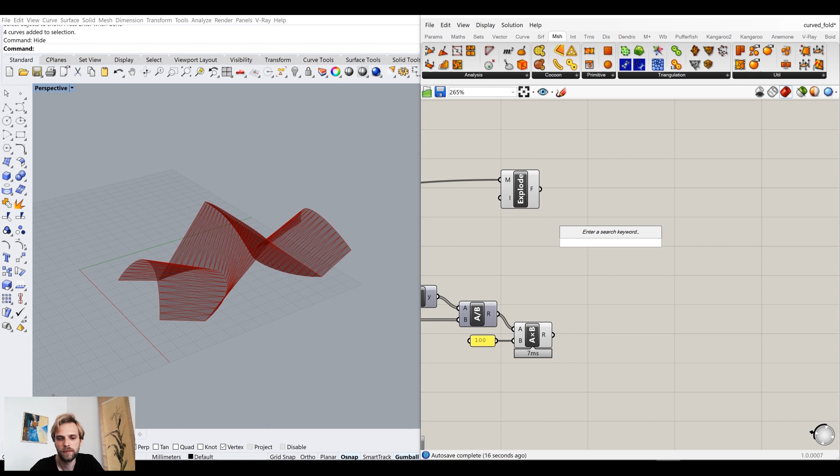All right. And now I want to color this whole thing, right? So how do we do it? Can we just mesh explode? I'll just explode the mesh, and I will say give me, sorry, I'm just thinking a bit. I have this mesh exploded, so this is every face and this is every value for every face. So we need to somehow convey these values into colors, so we will use gradient.

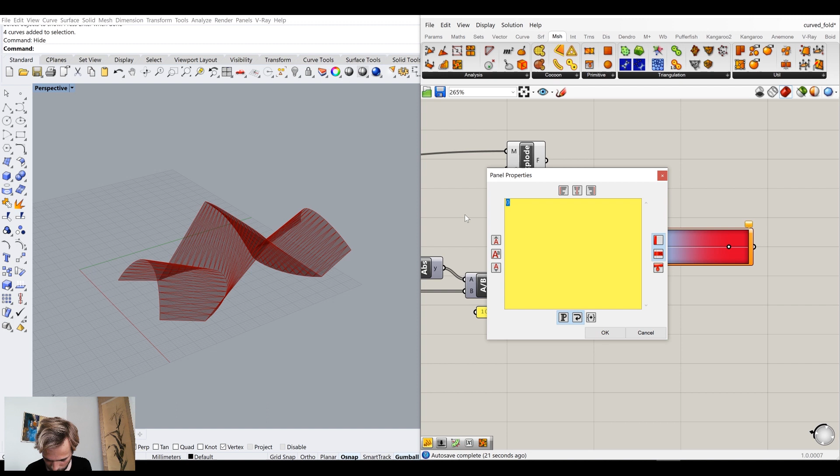We need to use gradient, and I will say that low values are something calm, something blue, and high values are red. And I consider low value to be 0%, and I consider high value to be, if you have 1 square centimeter and it stretches out by 10%, let's go for 25%. That's a really high value for stretching. And the actual parameters are the percentage that we got from here. So now the percentage is converted to colors.

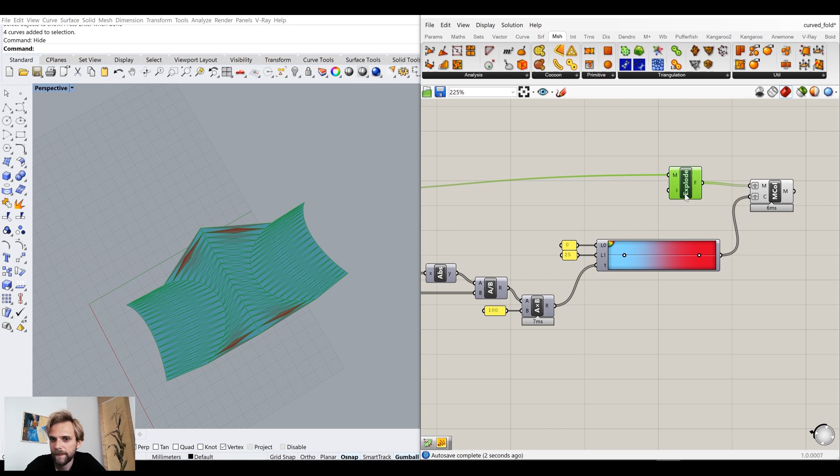Okay, and can I color mesh? Can I use mesh color? I saw something. Mesh colors. Okay, I will try to use mesh colors. Doesn't work. Let's try grafting and grafting. There we go. Now it works. Okay, that's perfect. So the mesh is colored, and I need to flatten this, so I'll just use mesh join to join it up, and that is our final mesh right here.

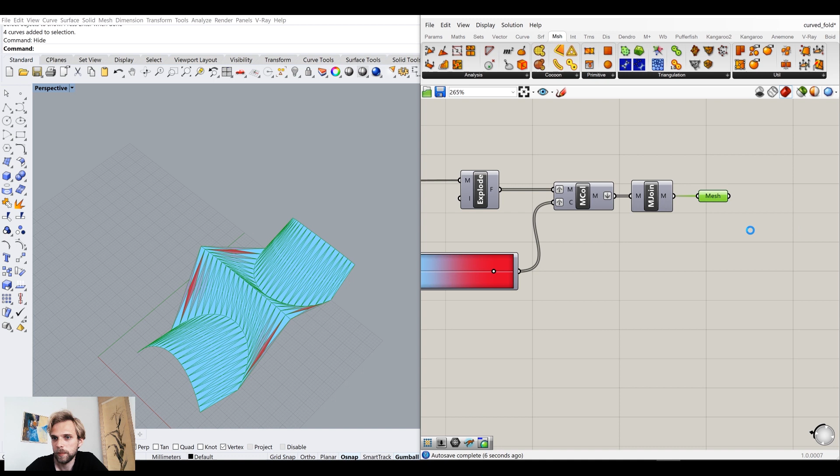Let me bake it, default, okay. I just want to see, oops, not artistic, shaded view, yep. So these guys right here, this is where most stress happens, and I think that's because of this arc right here. It's very heavy, and also on both sides these two arcs are stretching it out quite a bit, so it's doing that.

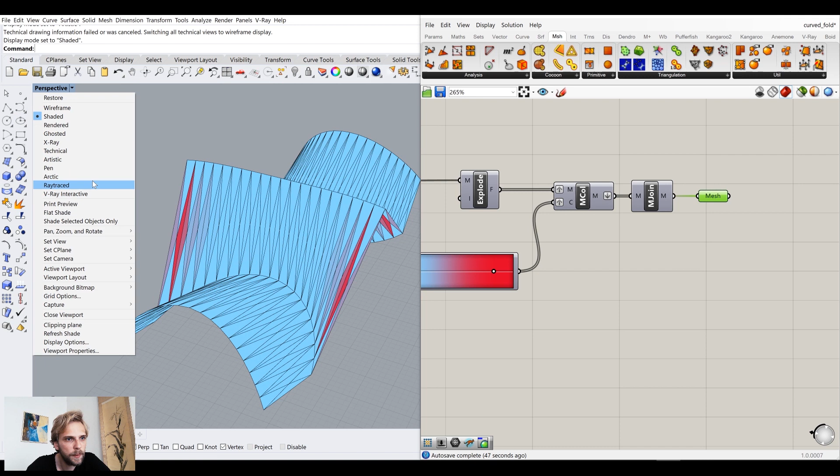Arctic view. Yeah, works in Arctic view as well. Super. Kinda. Ray traced. Doesn't work in ray traced. Anyway, so that is all from me.